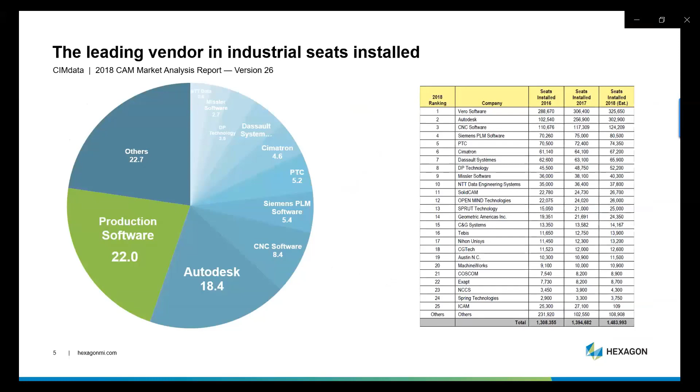Now let's see some of the product lines from Hexagon Production Software. Edgecam is a leading CAM system for NC part programming with unparalleled ease of use and sophisticated toolpath generation. It's the only CAM system you will need for milling, turning, and mill turn machining. WorkNC CAM software is the premier automatic CNC software for surface or solid models in mold, die, and tooling businesses, for 2 to 5 axis CNC programming. WorkNC is used by all Western, Japanese, and Korean automotive makers and well-known OEMs from a range of other industries.

Cabinet Vision is a software for woodworking professionals. It includes design, rendering, pricing, bidding, and cut list report capabilities. Radan is the total CAD CAM solution for cutting sheet metal. We understand metal is precious in your business, and with our software your company can significantly reduce inventory and increase material utilization, allowing you to realize the true return on your investment. Visi is a complete CAD CAM solution for tool makers, right from design to manufacturing. It offers great tools to reduce design cycle time and ensure productivity.

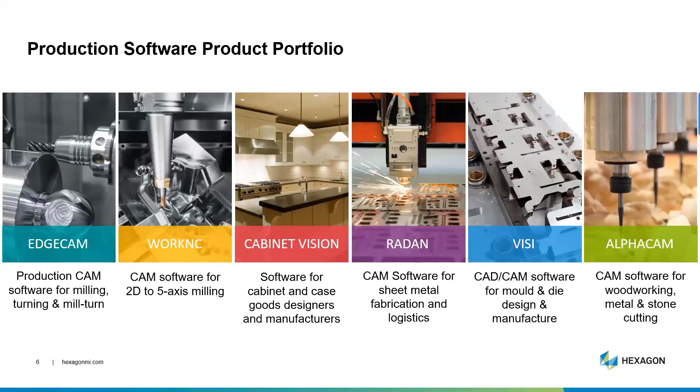AlphaCAM is another intelligent CAD CAM software for woodworking, metal, and stone cutting operations. SurfCam is a market-leading computer-aided manufacturing system for NC part programming. WorkPlan software solutions was developed to meet the requirements and replicate the specific procedures and codes of the CAD CAM industries: budget, time, manpower, materials, resources, costs, and cash flow. WorkPlan will help you control your manufacturing progress and increase your productivity.

Smart is the leading supplier to the whole world of powerful viewing software designed specifically for stamping die industries. WorkXplore is a powerful CAD collaborative viewer which can be used by various departments across the organization. WorkNC Dental is a dedicated CAD CAM software for milling complex dental processes. Fasis is a tooling and resource management software from Hexagon Production Software Unit.

So let us deep dive into today's topic, that is Visi. Visi is an industry-specific CAD CAM solution for tool makers. Right from design to manufacturing, we have all the different modules in Visi which is going to be helpful for your design activity and also going to be beneficial for the organization.

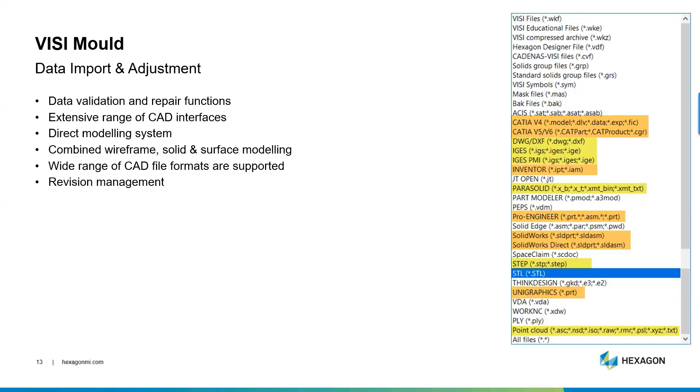But at the same time, you might receive an IGS or STEP file or any neutral file format from your customer. Working on those components is a time-consuming process because you need to get into details of fixing the geometrical errors. But inside Visi, how this can be done so easily with less time, let's look into that.

I have taken a small example here where I'll be working with an IGS file and converting it into a clean solid geometry. Hello, so welcome for the demonstration, and let me start by importing an IGS file.

So I import an IGS file with the default options. Here you can see the progress bar, which indicates what is the status of the import body. So this is the file which I have received, and I need to develop a mold or even a core cavity extraction for the same component. Before that, I would like to check for the validity of the body.

So here we have a search command where I can just search for a command or a particular option. The moment I pick up the command, I just follow the instruction space. This is helpful if you are a fresher or a new user. So let me select the whole body. The body seems to be okay, that means it doesn't have any self-intersecting contour or overlapping surfaces as such.

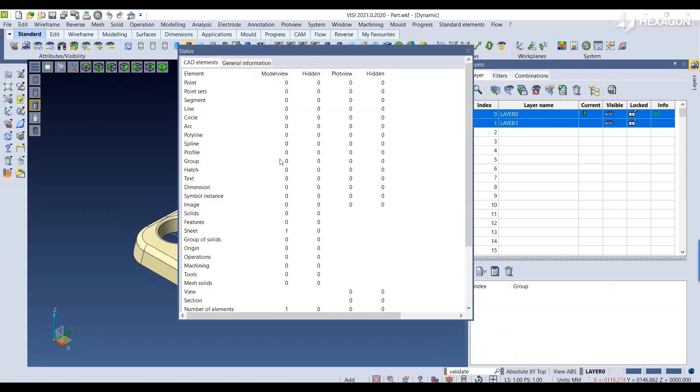The next option would be, let me check for the number of sheets or surfaces it has got. It has 0 solid and 1 sheet. So I need to convert the given sheet into a clean solid geometry. So how do I do that?

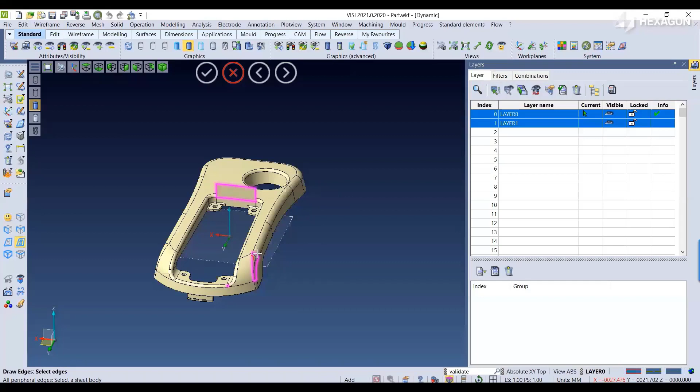So let me perform this, just hover the mouse. You can see that all the open edges are highlighted. So irrespective of the size, even very minute opening edges are listed. You can see that it is very much visible. So with this option, it is quite easy for any user to identify where the opening edges are available. The next thing would be, I need to fix this one.

So let me activate the automatic trimming option so that the surface will get trimmed on the necessary area itself. In the similar line, I would like to create a patch surface in order to fill these two contours. So let me do that. Have a look how easily the surface is going to patch by maintaining a proper tangency with respect to the existing surface around.

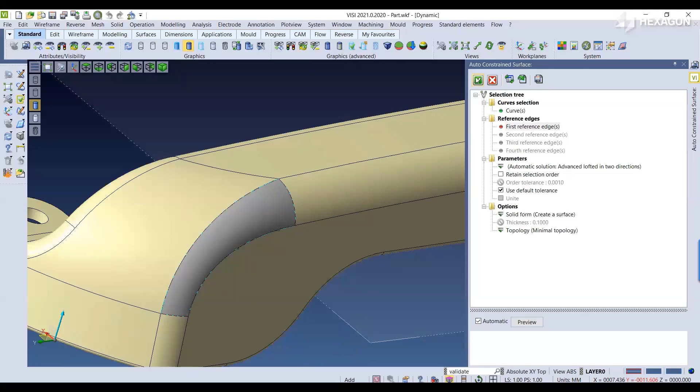Similarly, I would like to create one more surface here. So that's how. Let me unite this. Let me check once again. Yes, you see, I have got 1 clean solid and 0 sheet. So in this way, we have converted a given IGS into a clean solid geometry having no faulty faces or geometrical errors.

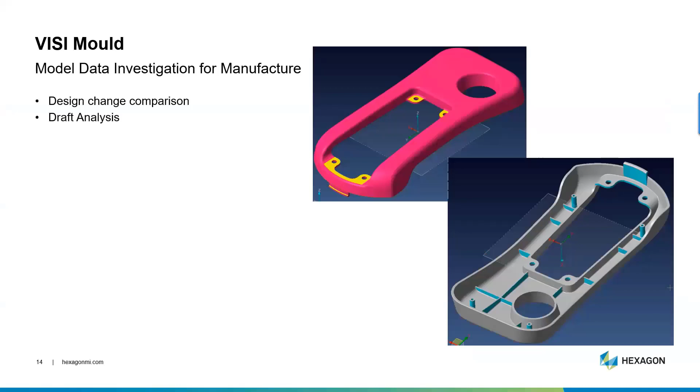So once you have a clean solid geometry, we have an option to compare with the given original data in order to see the similarities and the changes between the similar component. And also you're going to see in the next demonstration how we perform draft analysis and check what are the faces which are not drafted. Plus we will also demonstrate how we can create a parting line, parting surface and core cavity extraction.

So once we have converted into a proper clean solid geometry, the next option would be I need to check for the draft analysis, because I'm not sure whether the given component is completely drafted or not before we proceed with core cavity extraction. So let me perform the draft analysis.

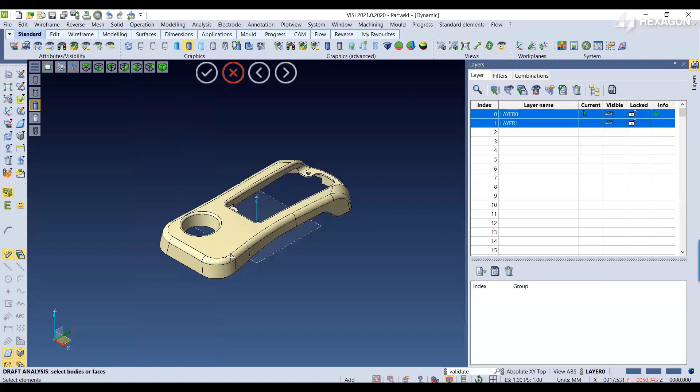This is the part, and then I would like to change the color graphics as per my requirement. You can customize the same. You see that this gives you a nice color code which indicates the undercut and the core cavity split surfaces. So that's how it is very much useful in order to, before getting into the core cavity split, it is equally important for us to know where exactly the software identifies the parting line.

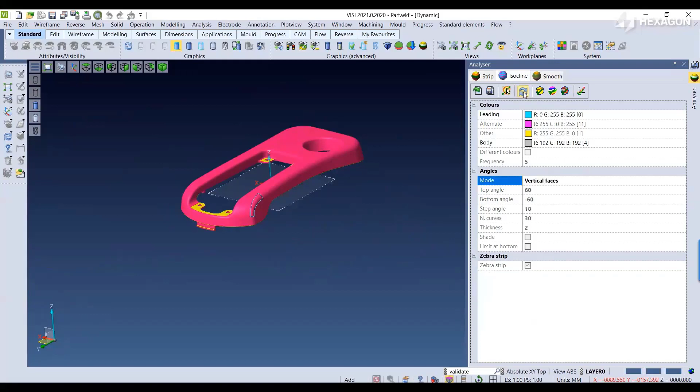Going forward, I would like to check if there are any openings or any draft faces or not. Hope you can see that the green color indicates these are all the non-drafted faces. The gray one indicates it is drafted.

The same can also be checked with Surface Analyzer. Have a look. You see the draft angle is 0, and here it is drafted with -10 degree. So all the colored faces are non-drafted, and the ones in gray color are drafted.

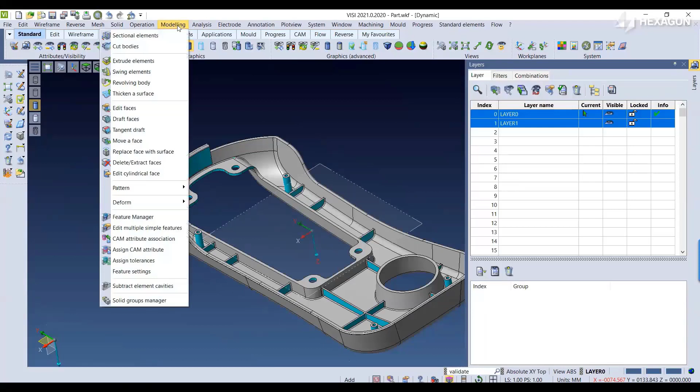So if you want to go ahead with this, I would like to imprint the color code so that it is easy for me to apply a draft and then check it accordingly. So let me apply a draft now, onto this face.

If you see, I have a beautiful option to make use of, because the blend is already available, so I need to apply the draft angle, and automatically the blend is recreated every time. So this is how the draft can be applied. Let me apply a draft over here.

Visi comes with a very powerful selection method. How exactly? Have a look. I would like to select from this region to this, and this is the face to be drafted. So without much clicking and picking, I have selected the entire range in just 2 clicks of a button. In a way, Visi is very powerful in selecting the required surface or geometry.

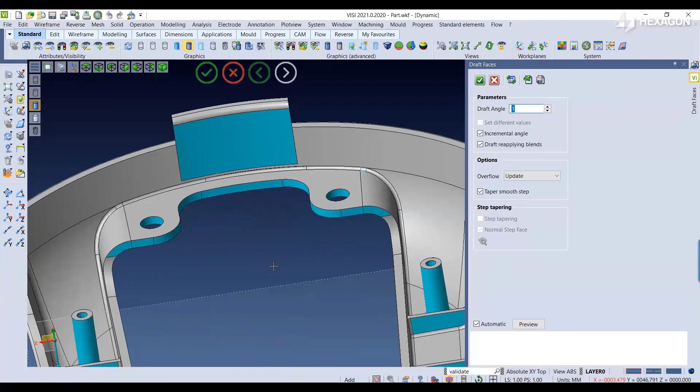So let me apply a draft there, and then I will just run a draft analysis once again on the same component. Let me update this. Yes, can you see that this face, which was colored like this before, is now turned to gray, even over here. This indicates that we have applied a draft, and the color graphics is also updated.

So going forward, I have already completed the entire draft over here. Let me open that. So this is the model which is completely drafted, and you can check it with respect to the data shared by the customer. So what do I do now?

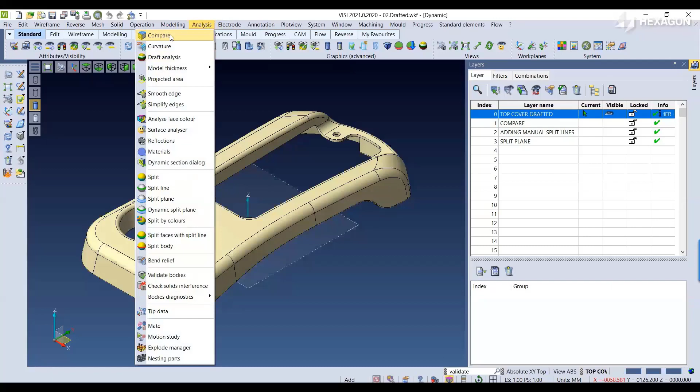Let me have a comparison between these two. So I use a compare, and these are the two parts to be compared. Let me pick one and also select another one. Just go for a comparison.

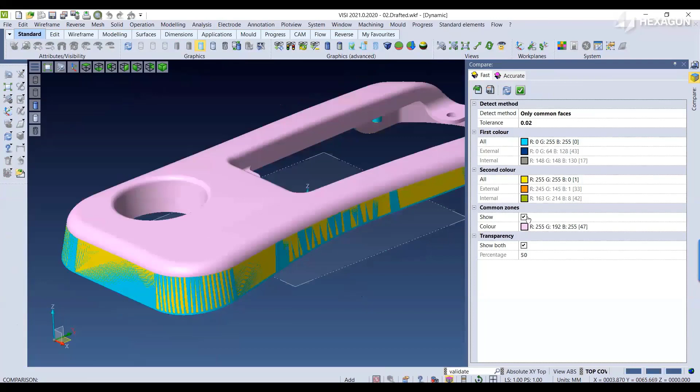You see that the pink color region indicates the common face, indicating the two different faces from the two components. So if you would like to untick it, you see this is the exact change, or what are the internal and external differences that you got.

If I want to show only the external to internal, you can also take this option and have a look. Yeah, this is the exact change, indicating the internal and external differences. If you want to see the change, this is pertaining to component 1, this is with respect to the second part. So that's how the comparison tool is very effective in comparing two similar models.

So what we have done so far: we have analyzed the given IGS, converted it into a clean solid geometry, checked for the draft faces. Wherever the faces were not drafted, we applied a draft, and then we also compared it with respect to the original data supplied by the customer.

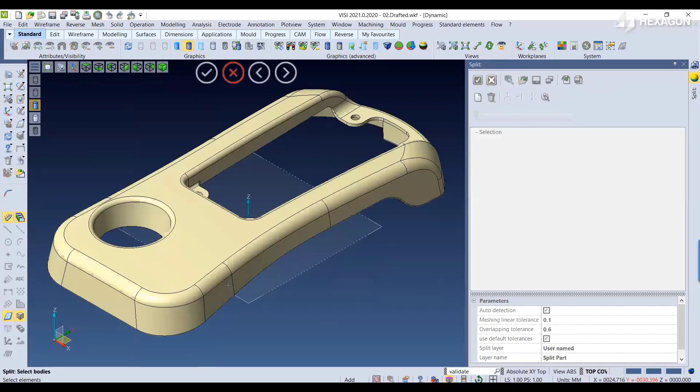Now the next option would be, I would like to create a core-cavity split for the given part. How do I do that? Let me make use of the automatic option by splitting this part. So let me select the given part, and the rest will be taken care of by the software in order to split it automatically. Have a look.

So this is how the given part is split across, having the core and cavity side along with an undercut and the side cores.

Suppose if you do not wish to go with the software recommendation, you can just quit that and create your own as well. So let me create a parting line by my own. So here, this is the part which I need to go for.

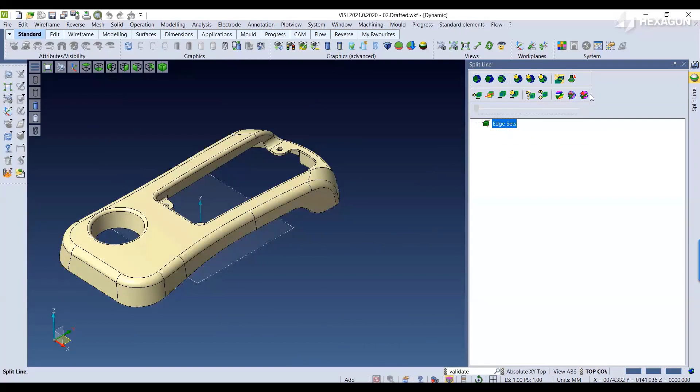Have a look, easily we have created a parting line. If you're okay with this, you see the core cavity is properly extracted.

So now let me apply this and then draw a split line. Once you apply the parting line, the next option would be creating parting surfaces. So let me do that.

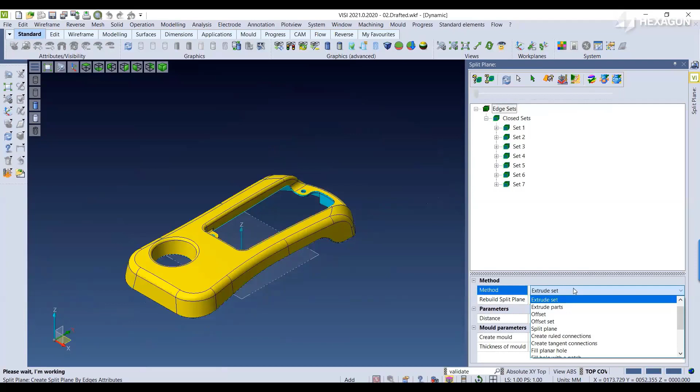I just make use of the dynamic split plane option here. Change the shading mode. Ensure that we have multiple methods of creating parting surfaces. I use the one which is relevant at this time, and then I would like to pick this edge up to over here. I would like to create a parting surface.

Similarly onto the other side, from here. Hope you're observing that I'm just not selecting each and every edge manually. So you see, now let me use some other option.

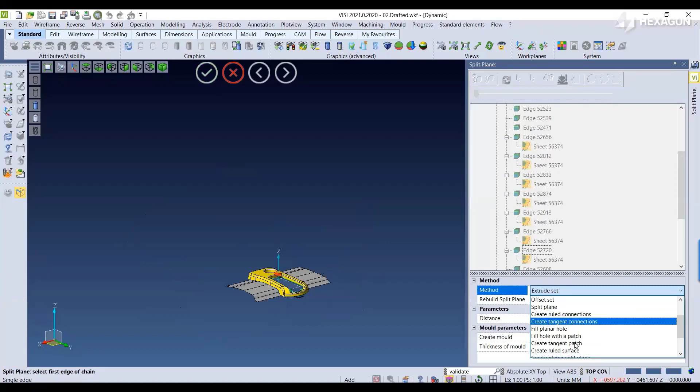Probably this time I would like to create a tangent patch from here to here. Have a look how easily we have created a very smooth surface connecting the other two surfaces.

On a similar line, I would like to create and complete the parting surface creation along with the peripheral edges. There you go.

So that's how the parting surface is created for the set across, and I have many more to do that. For example, these are all the parting lines which I need to fill hole with a patch.

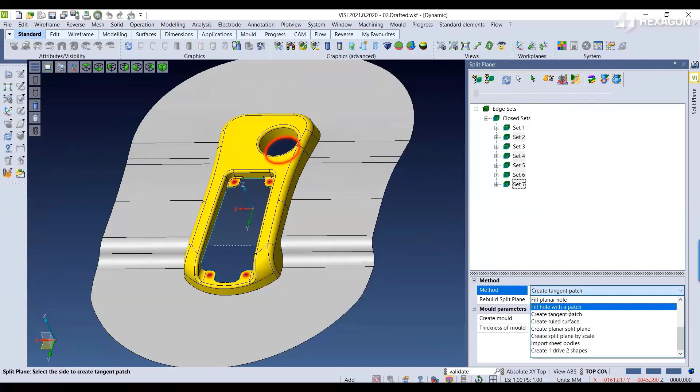Let me update it. You see, in a single click all the holes have been patched properly.

Suppose if you are using one or the other CAD currently, you can also import any geometry created in some other CAD file. So let me do that. I would like to import this body over here.

Okay, so let me apply for this. Now I would like to import, say, merge this. I'm just importing a sheet which is created in some other CAD file, but as Visi supports different file formats, I'm just importing a step file, and let me merge it like this.

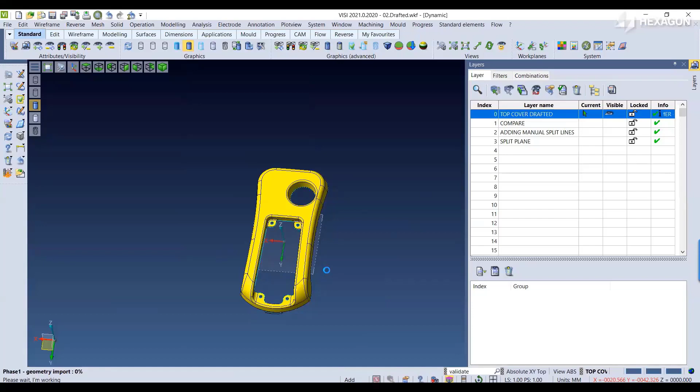I'll go back to my parting surface, change the shading mode, import the sheet body, and yeah, so this is the sheet body imported, where it is automatically going to consider that as a parting surface.

If everything is fine, you just have a check. You see how we have created a core cavity extraction from this. So let me decide the thickness of the mold and say create mold.

Yes, so we are done with the first phase, that we have created a core cavity insert from the given part. So let me show it to you once.

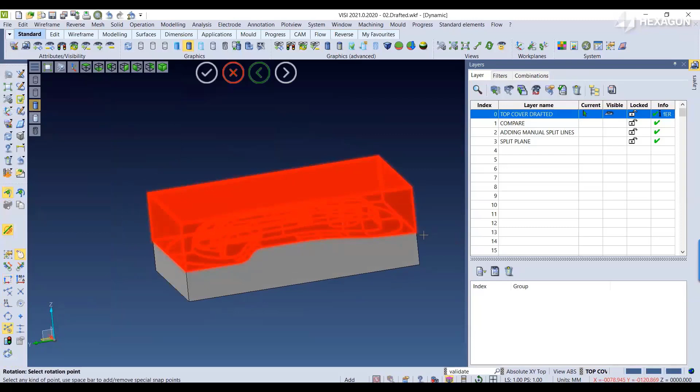So this is the part file which I've got, and over to it. So this is how we have created the parting line, parting surface, and the core cavity extraction.

So in the next demonstration, you will be visualizing how we can build an entire mold tool on the core cavity plates created. In addition, you will also see how we make use of standard elements and user-defined elements in our mold design. Plus, we will also show you how we can create a slider core and lifter mechanisms for the mold design.

So after creating a core cavity split, I would like to build a mold tool for the same, where I just make use of a tool design option. The software is going to load with the default, but then let me pick the insert plates.

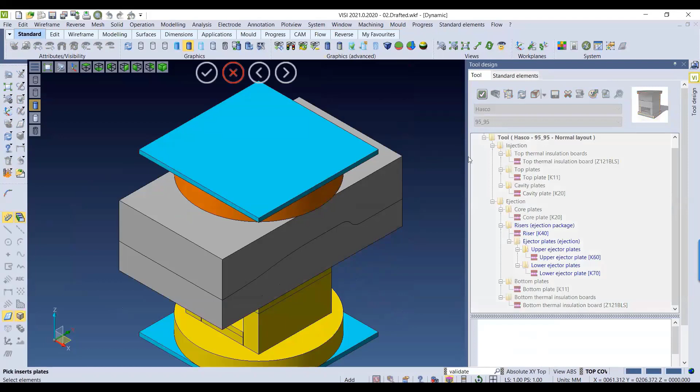So I would like to define with respect to the given origin. You can see that automatically the entire mold tool has been updated.

So here you can also select the standard as per your requirement. We have DME, Futaba, Hasco, Meusburger, Pedrotti, Strack, etc. And suppose in this case, if I want to choose Hasco, I have got various configurations over here, let me select the one as per my requirement.

Once the mold base is built, you have more flexibility in order to decide what plates you have to customize. In this example, suppose if you think this is not relevant to my design, you can just say delete it. You can also do the same thing onto the bottom one.

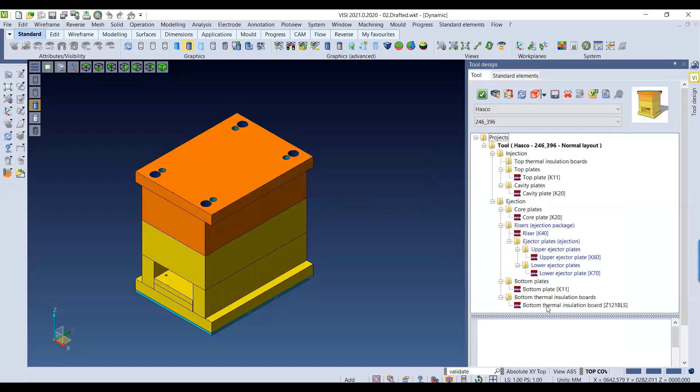Suppose if you wish to change some of the dimensions, you can just go and pick up the plate and you have different options here to select for. Similarly, if you want to change some of the items here, you can just change accordingly the way you require.

So similarly, if I want to change, say let me give an opening value about 2 over here, and then ejection side opening value about 2 again. So that is how the complete mold base can be configured and customized as per your requirement.

Going forward, you can also add the preliminary standard templates with respect to the Hasco which I've selected. So let me load the Hasco one, and this is the normal layout which I'm going to make use of.

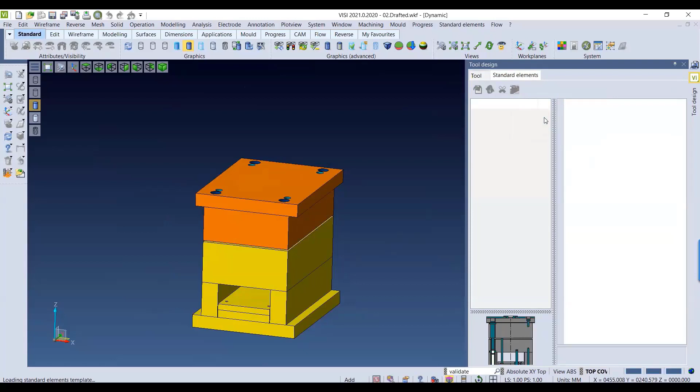Automatically the software considers the standard elements with respect to the configuration selected. You have an option to select or deselect as per your design intent. For example, if this locating ring is not required, you can untick to delete it. Similarly, I don't want it on the bottom side either, so let me untick this. With the remaining options, I'll go with the default and accept this tool base.

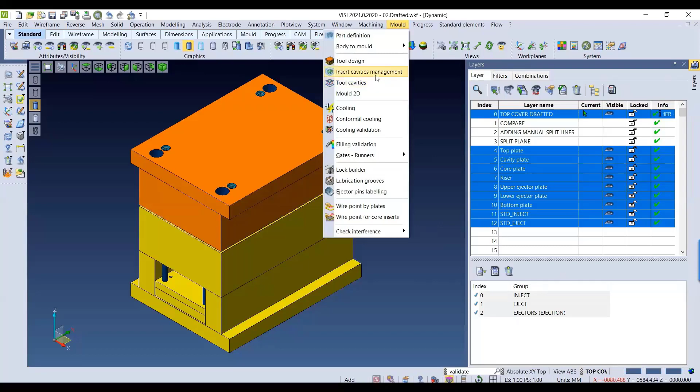Once the tool base is accepted, you have the complete mold base created for your part. Now let us move forward by creating some cavity inserts and using some standard elements. I'll go for insert cavities management and choose the plates accordingly. I have got the inserts to be selected.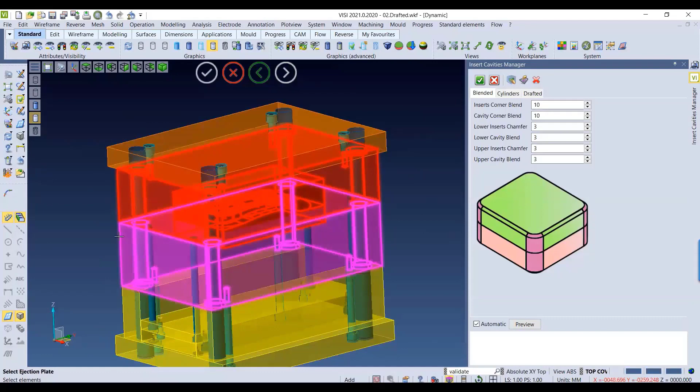I need to pick up the ejection plate. The instruction space tells me what exactly I have to pick now. So I'm going to select an ejection plate, and that's how the cavity has been created on these two plates. If you want, you can choose between the cylindrical type or go for the drafted one. The preview clearly shows what type of insert cavities we are creating. Let me accept that.

Once the cavity has been created, I'm going to make use of some standard elements. Let me show you what standard mold catalogs are available within VISI. You see, we have many suppliers available in our library, and out of these, some are frequently used, so they've been customized and kept in the standard element list.

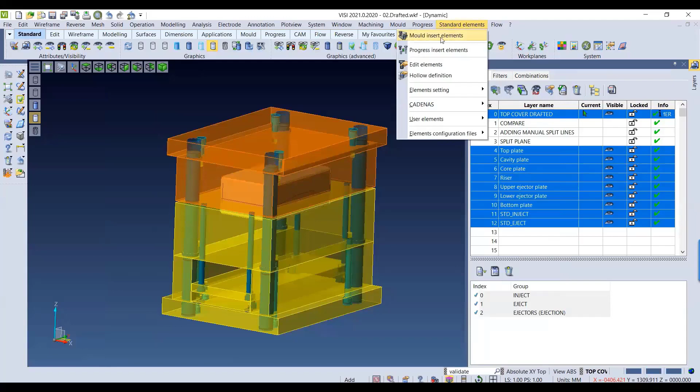Now I would like to insert some mold standard elements. Let me use Hasco, and I'm going to make use of a sprue bush. I have got different parts here. Let me choose Z511R. Here it clearly states what plates are to be selected.

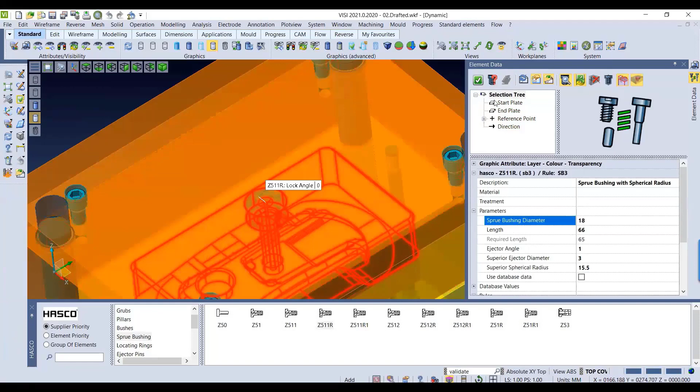This is my start plate and this is my end plate. I would like to go with the default setting, and you have different configuration items to be selected for. Let me use the default one and accept it. That's how the sprue bush is created here.

Now there are a few parts which are customized, and I need to use them in the existing design. There are a few non-standard parts which I can bring in and consider as an element or a standard one. So how do we do that? Let me use some of the user-defined elements. I would like to load the user elements here.

So I'm going to pick the user element. I've got this register ring which is defined or created by the user. Here I have an option to place it accordingly, and if you want you can add an instance or confirm this. Once placed, let me go to the solid group manager and dissolve this, so that it behaves as a normal part. That's how we can also bring user-defined elements into the mold base.

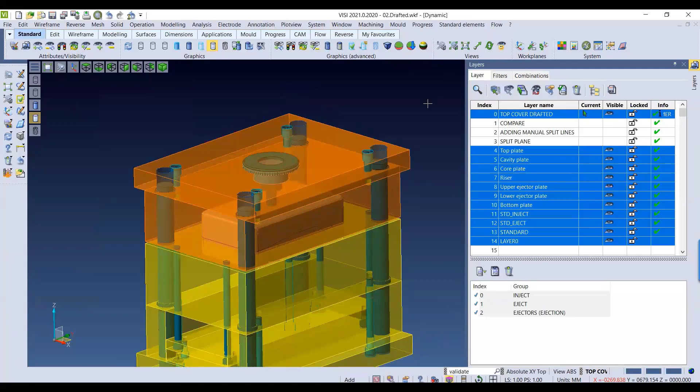Let us switch back to standard elements, and this time I'm going to use the fixing. I'm going to select the start plate and the end plate. Let me define it by selecting over here, with the diameter I'm going to consider 8. Okay, confirm this.

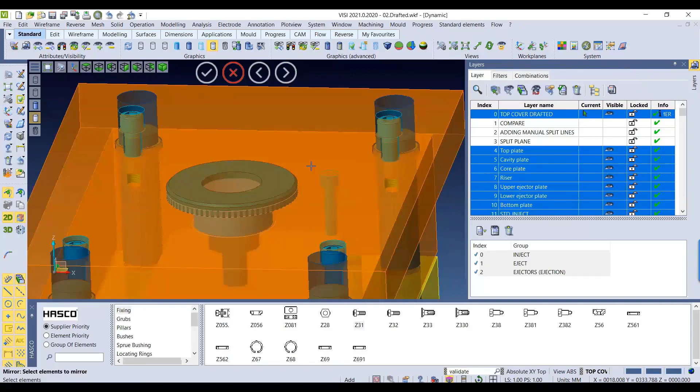And now I shall mirror it. The best option of mirroring here is we can mirror it about this element to be mirrored across these points and all together. You see, in one mirror command I have created a mirror about two directions - one is X and one is along the Y axis.

So until now we have seen how to add cavity inserts and use some standard elements along with user-defined elements as well. Next, let us see how we define lifters and slide cores.

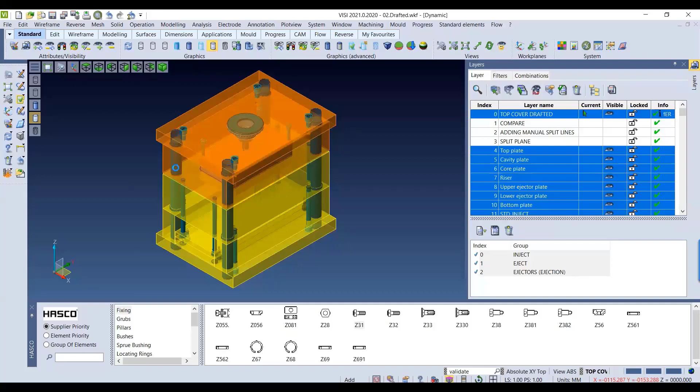Now let us define a runner gate and also a cooling channel. Let me turn on only the injection assembly. So here, let me say create runner. I have a runner wizard which takes you from circuit, section, parts and also the gate along with an injection cone definition. You have different types to be selected here. Let me choose the one that is straight for me, and hope you can see the preview over here.

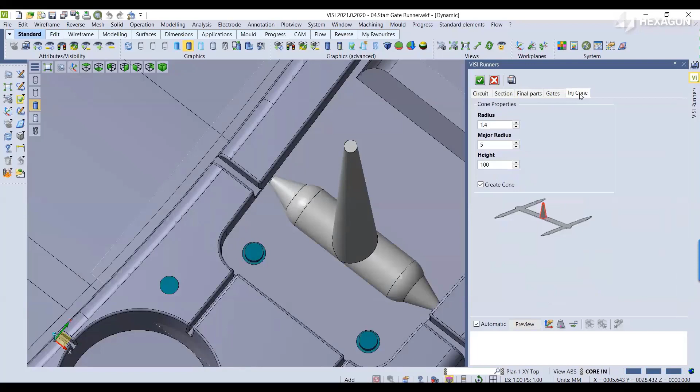Let me go for a section. You can go for a semicircular, triangular, trapezoidal, or circular one as per your requirement. Let me have a total height of say 100. This is the cone created for the injection cone. Let me accept the result.

You see, that's how a runner gate is created for this component.

Going forward, let us also add the cooling circuit for this design. If you see, this is the existing cooling circuit that I have added. Let me show you how we do that. You can add a group for this and then sketch the channel required.

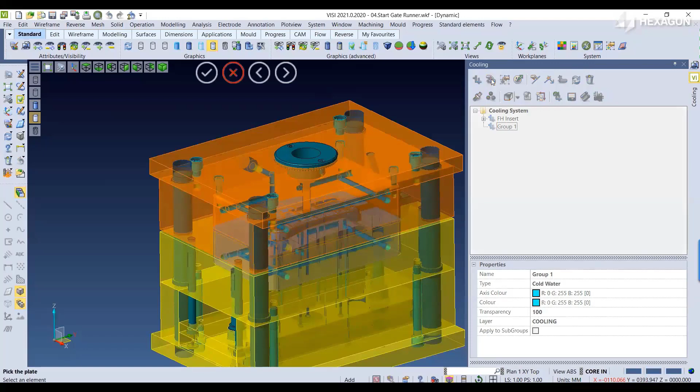This is the plate where I need to go, and I can select the orientation. If I would like to have the cooling channel from here over to this length, that's how the cooling circuit is added. You can also add fittings over here.

Let me choose the one, confirm this, and I would say solidify this cooling channel. Hope you can see that this is the cooling channel I have added now.

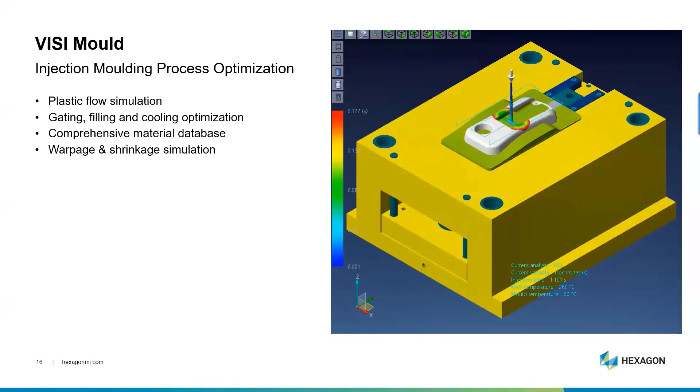Visi has a dedicated module called Visi Flow, where you can perform plastic flow simulation, which comprises gate location definition, filling stage, holding stage, and shape analysis. We have a wide range of material database to simulate it, plus you can also estimate warpage and shrinkage. In the following demonstration, we are going to see the light version of Visi Flow called Flow Lite. If you have a Visi mold license, you can comprehensively perform a part-level flow analysis.

Let us have a look into the same example. Let me use the Flow Lite wizard. I would start by creating a mesh for the given body. Let me choose the default options, or you can change some settings, and then accept it.

You can see that we have created mesh data. Going forward, I will assign and compute the thickness. So thickness calculation is in progress, and some deviations are available. If you want to change that, you can assign a thickness, or else proceed further with formatting.

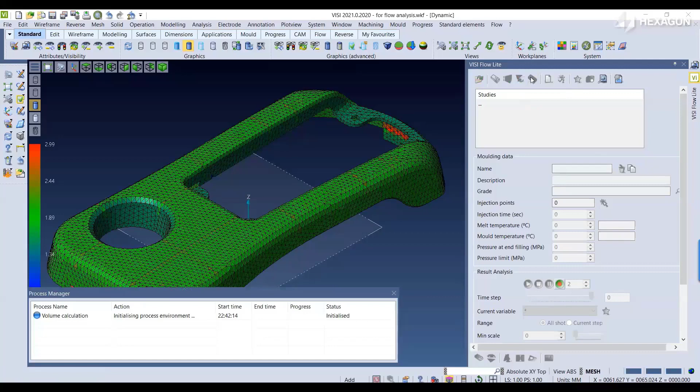Let us give some relevant name for this—it's a flow analysis at part level.

Once the given parameters are formatted, you are good to go to define the remaining boundary conditions like injection point, material, etc. So let me assign a material. I go with the default ABS option, and then I would like to pick up the injection point here.

So let me pick up one injection point, and then another injection point. Once you have selected the two injection points, you can have n number of points picked. Here you can also check for different configurations—what if the injection point is selected at this location, how the results will vary, and what if the injection point is changed, how the relevant result is going to depend upon that.

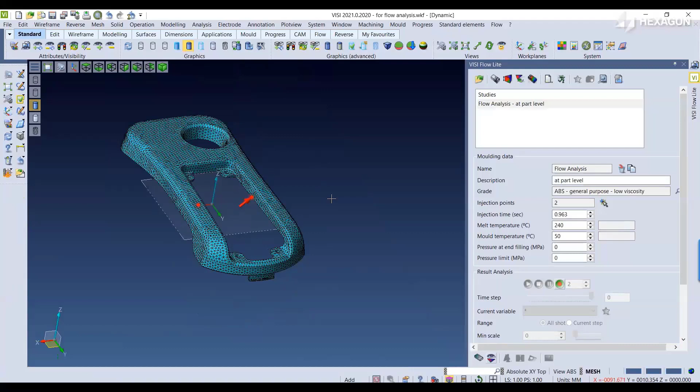So rest all is fine. Let me calculate this flow analysis now. In the light version of Visi Flow, you can estimate the temperature and pressure distribution across the part at the filling stage, and also evaluate air traps, sink marks, and weld lines.

So it is going to compute the weld lines created so far. Have a check on this, where the weld lines are created. You can also find the air traps.

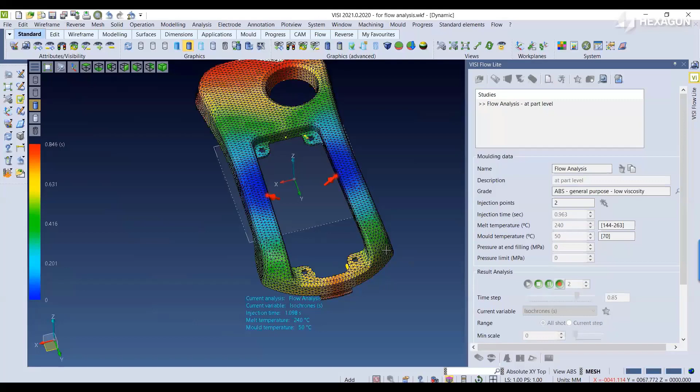With this, you can also check the overall quality of the part. The one which is saying it is too high—the pink indicates the problematic area. Let me go for the pressure at the same time. Have a check on the overall quality.

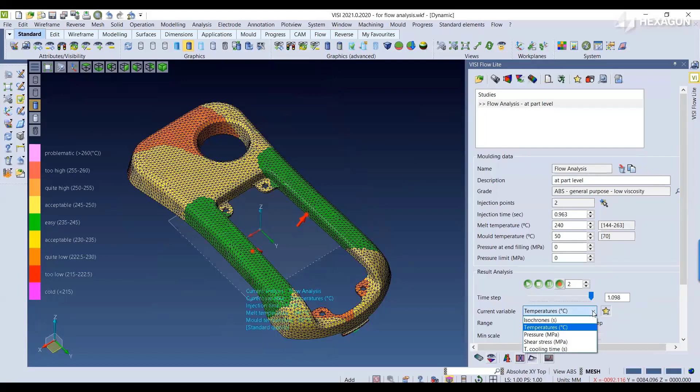You see, the pressure distribution across the part is very good. So this is how the quality of the part can be estimated with the help of Flow Lite.

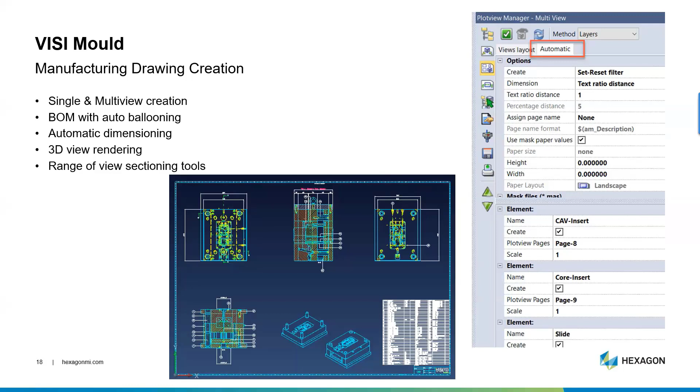Once the complete mold tool is built, you can perform a collision check as well as a physical dynamics check by simulating or animating the mechanical movements of the entire assembly in Visi software. Nonetheless, Visi has a very powerful documentation option where you can create a complete set of part drawings and general assembly drawings in a much easier and automatic way.

So far we have seen how to import an IGES file, look for geometrical errors, fix that, convert into a clean solid geometry, and look for the drafted faces.

If it is not drafted, apply a draft, create a parting line, create a parting surface, and then create a core cavity extraction. Once the core cavity inserts are extracted, we have built a complete mold base as per industry standard, using both user elements and standard elements. We have also seen how to add a slide core assembly with a lifter or slide core pin, and created a runner gate system along with a cooling circuit.

So with this, we have come to the final stage of mold design, which is documentation. Nothing is complete without documenting the entire design we have created so far. Let me go for the documentation. I'll switch to automatic mode and just say create it. Use the automatic option, sit back and relax, and the rest of creating part drawings, assembly drawings, everything will be done by the software itself.

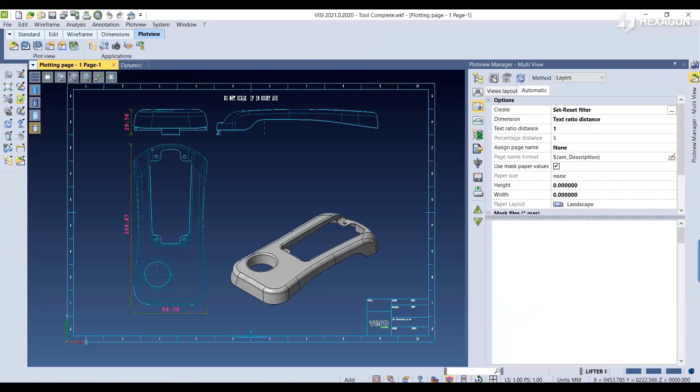Hope you can see that these many sheets have been created by the software with the peripheral dimensions. If you would like to add apart from this on your own, you can still select it, choose your own page, and define the mask for this. Now let us define standard views. Even here you can change the scale as per your requirement, with all the flexibility and freedom to change it.

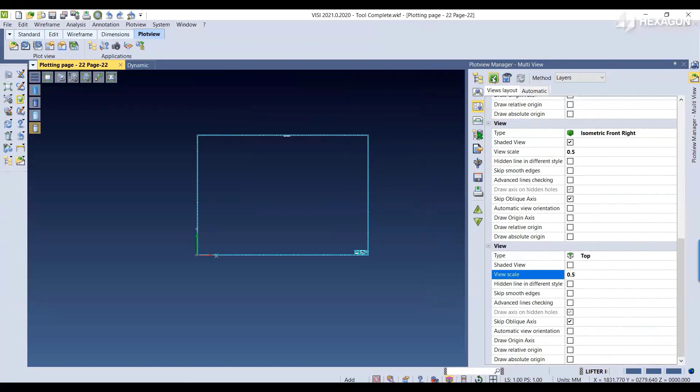Nothing is complete without adding a part list. Let me use all the rows, and that's how you see the complete assembly drawing is created with the bill of material or a part list table.

Visi Electrode offers a complete solution for electrode extraction, stock definition, and managing the entire set of electrodes created, and documentation is much more easier. Let's have a look into this.

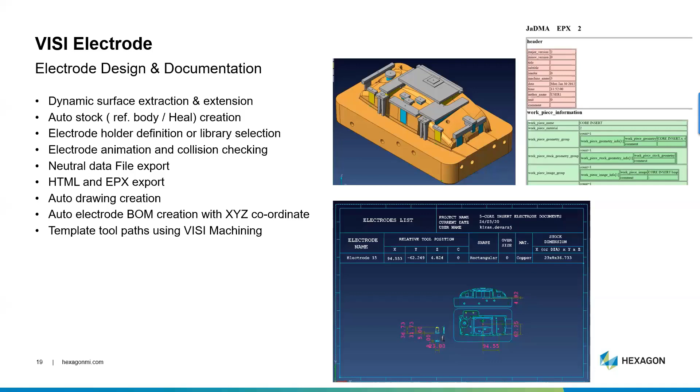Now let us see a demonstration of electrode design and documentation. In Visi we have a dedicated set of commands under Visi Electrode. Let me extract an electrode. So that is the area where I need to extract it. You can see that the electrode is automatically created.

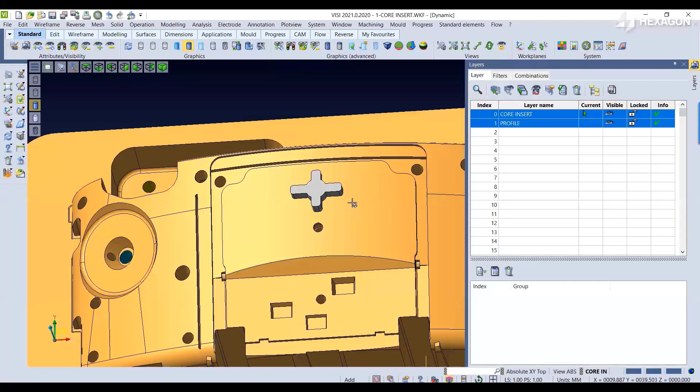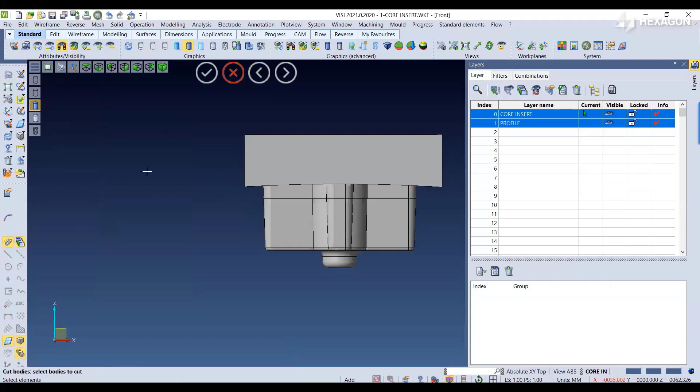Now let us see one more method of creating an electrode. I can also switch back to the CAD function in order to see another way of extracting the electrode here. Let me move this face a little bit upward. Meanwhile, I would like to create an electrode extraction from this piece of geometry. Let me highlight the one of interest. You can also see the CAD capabilities in creating this.

Since it is difficult to manufacture this type of electrode with sharp edges, I would like to modify the same. Let me apply some radius. That's how an electrode is extracted.

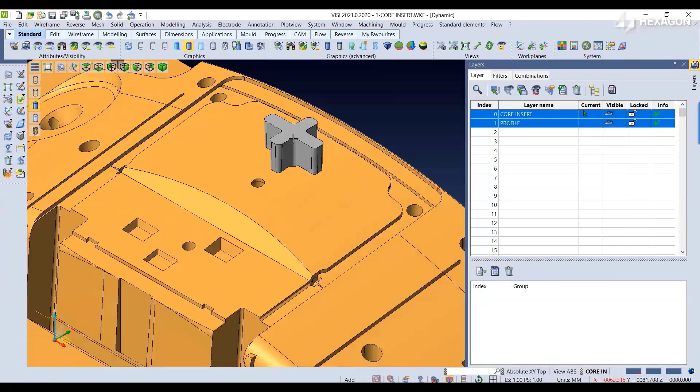Let me change a bit over here. Now for this electrode extracted, let me define a stock. I just need to pick this up and the body to check for a collision. You see the relevant stock has been added. You can also set the stock type either circular or rectangular. You can also mention the width and depth of the stock definition, or there are some standards available where you can pick this up again.

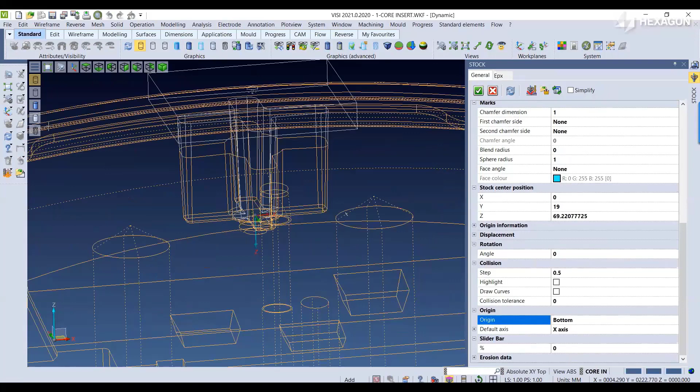You can also change the reference axis from top to bottom, manual, or even at the stock bottom face. Let me have it from the bottom surface over here, and then for this you can also check for a collision if any. No collision detected. That's perfect.

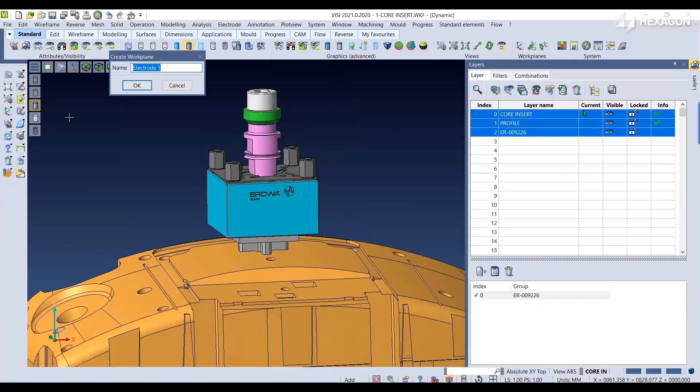Similarly, let me show you how we can add a piece of electrode on a different region. This time I would like to select this slot. This is the body to check for a collision. And then you can also check for collision here. You see there is a collision detected.

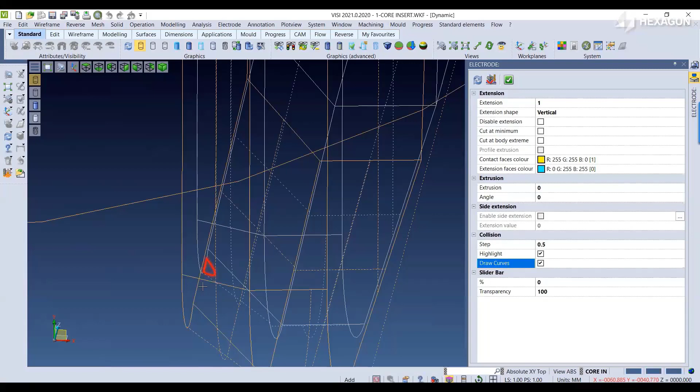If you would like to highlight it and draw a curve on the collision check, you can turn this option on. Can you see this here? It's been highlighted by drawing a curve where there is a collision. Modify this and then apply a blend over here. Now let me extract an electrode once again.

To add some strengthening purpose, you can also mention the extrusion along with an angle. Check for a collision.

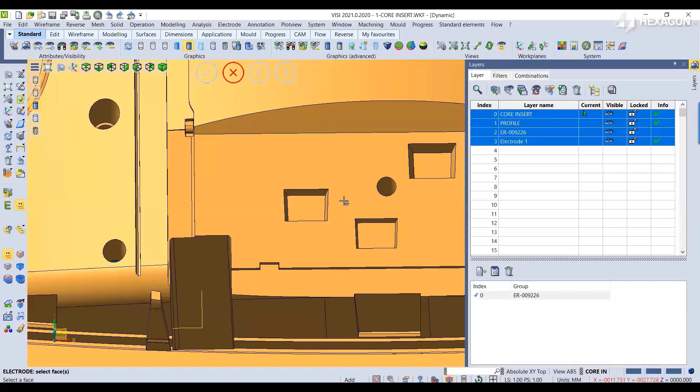Perfect. I will show you one more electrode extraction on this region. This is the body to check for a collision. I would accept with the default option.

Let me create a stock for the same. This is the body to check for a collision. If you want, you can reduce the width and depth of it, and then confirm this.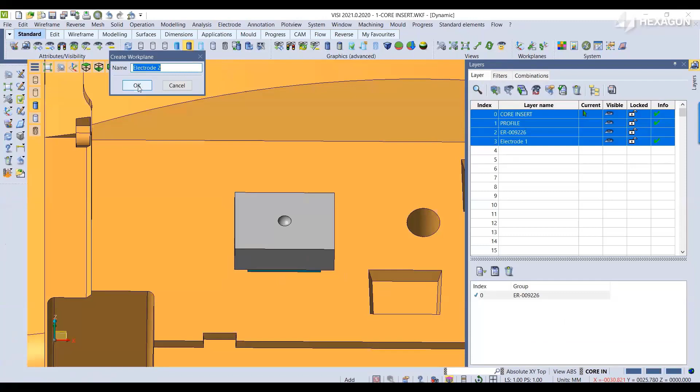Now all the electrodes created can be well managed with the Electrode Manager option. Here all you have to define the project parameters.

Electrode project is the name given, who is the sender, which machine I'm using here, who is the author, you can also mention the same, and this is the workpiece to be picked up.

That's the core insert name. If you want, you can also define the material.

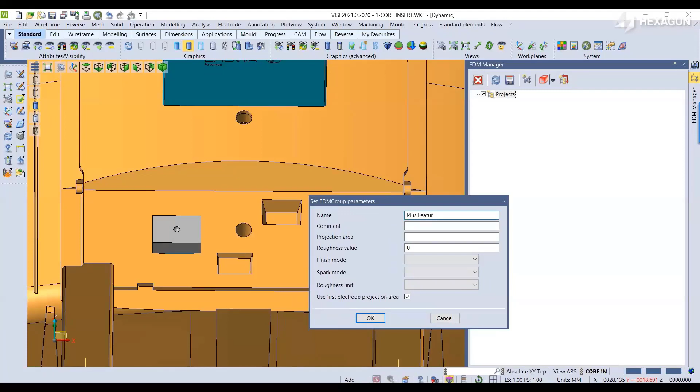I'm going to define a plus feature electrode here. You have a provision to define the finish mode, the spark mode, and the roughness unit value. Typically we go with RA, and let me have 0.8.

This is the electrode to be picked for. There it is. Similarly, I can add another group. This time I would say it's a square pocket.

And in this one, this is the electrode to be picked for. The electrode has been defined in the EDM manager. Now I can create multiple electrodes by a drag position method.

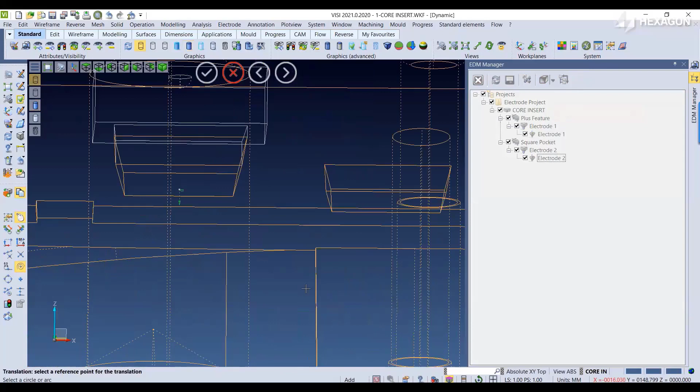This is the reference point to be picked and placed, one and another one here. Now creating or documenting all these electrodes is much more easier in Visi Electrode. Let me show you that.

I go with the list and then just confirm the list over here. You can also define the mask. Let me use portrait type. So here are the list of electrodes created.

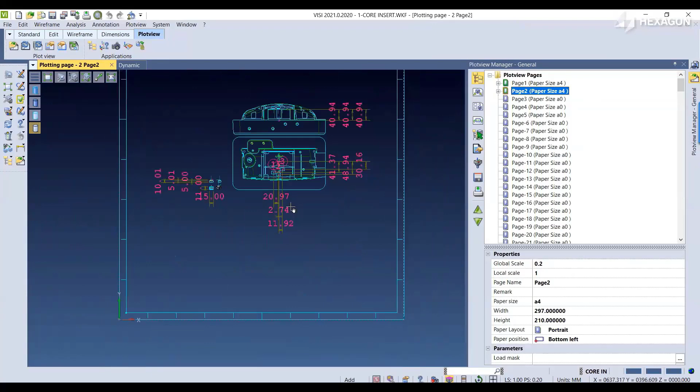So this has the electrode list along with the relative tool position and the type of electrode used, the oversize, the material, and the stock definition, when it is created. All the piece of information are available here. A complete report.

Let me define it on the desktop. I'm gonna create with a new folder. I would say this is my electrode report. Pick this one once again.

So this is how all the piece of information has been added here. You can see that the electrode has been created, and plus you also have the detailed information, the position for 2 electrodes, 3 electrodes created.

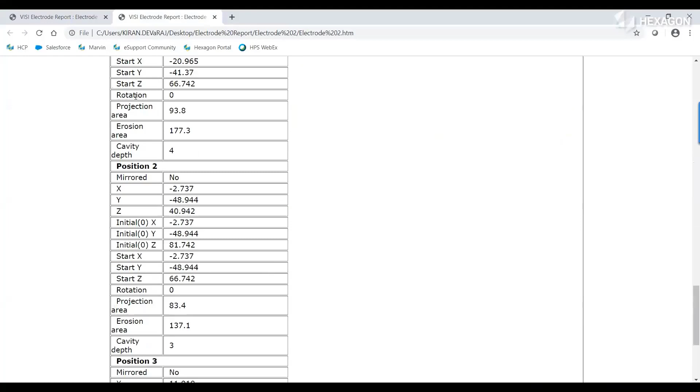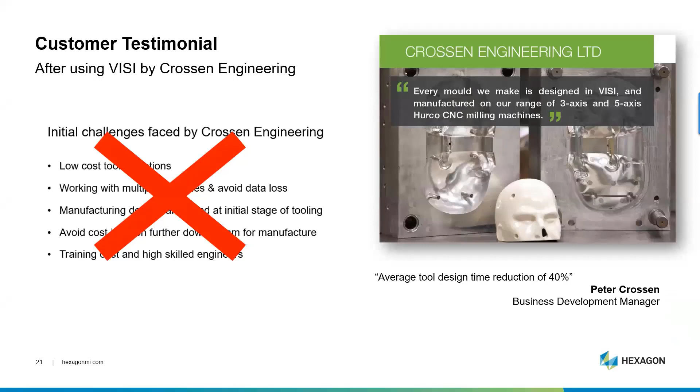And also he says that every mold we make is designed in Visi and manufactured on our range of 3-axis and 5-axis Hurco CNC milling machines. So this is the testimonial from Crossen Engineering. So with this note, I would like to conclude that Visi is easy.

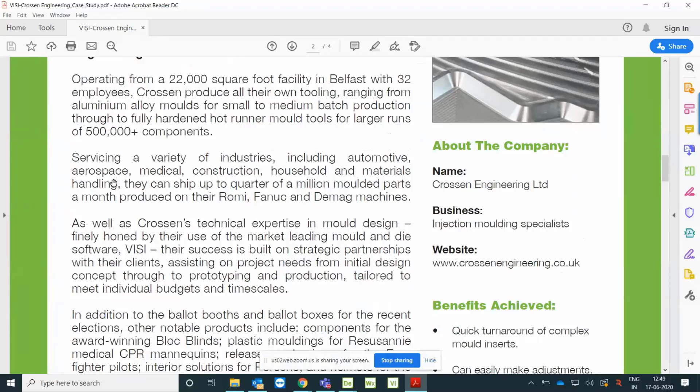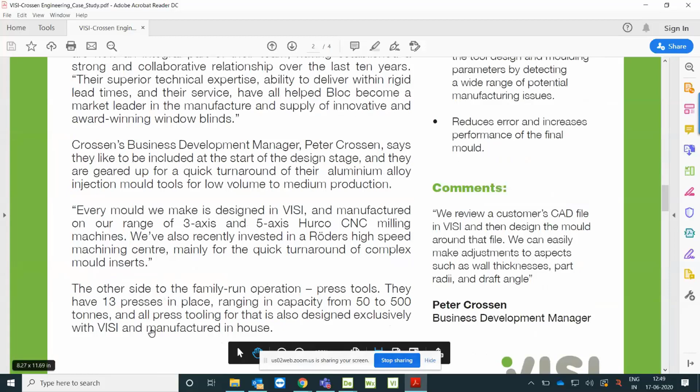So they have used complete Visi license. Hope you can see that. Yeah, there you go. You see, the other side to the family run operation press tools, they have 13 presses in place, ranging from 50 to 500 tons, and all manufactured in-house using Visi itself. So they have reduced error and increased performance of the final mold. What VisiFlow has done is preventive analysis. The software optimizes the tool design and molding parameters by detecting a wide range of potential manufacturing issues. So any adjustments, any modification, they can do it quickly and easily with our flow license, VisiMold.

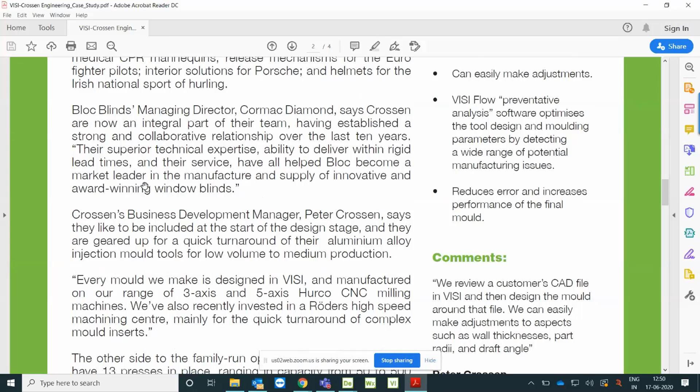So this is what the managing director has talked about. Their superior technical expertise, ability to deliver within rigid lead times, and their service have all helped Bloc become a market leader in the manufacture and supply of innovative, award-winning window blinds. They have used the Visi CAD module for several years, but have only recently installed VisiFlow, which is now playing an increasingly important part in their process.

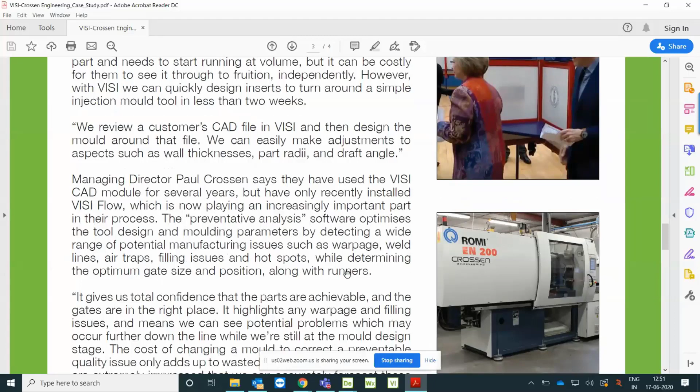One more question was asked, on positioning or optimizing the gate size, position and location along with the runner. The preventative analysis software optimizes tool design and molding parameters by detecting a wide range of potential manufacturing issues such as warpage, weld lines, air traps, filling issues, and hotspots, while determining the optimum gate size and position along with runners. That gives total confidence for the parts achieved using the VisiFlow license.

So here it has a detailed story of what they are using and how it's built, and the benefits for them. You can make use of this. I've got many more case studies like that—so many customers using our product across the globe.

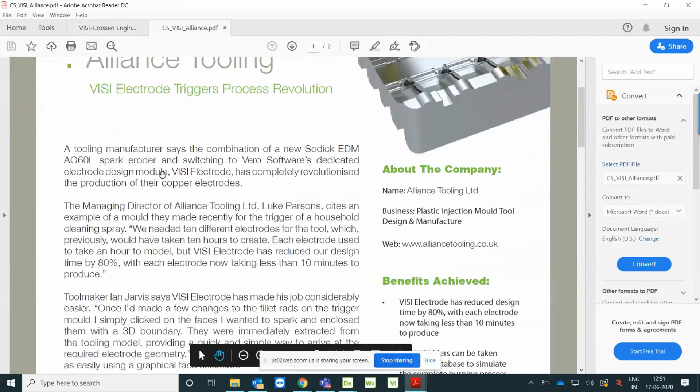This is one more customer using Visi Electrode. Visi Electrode has reduced design time by 80%, with each electrode now taking less than 10 minutes to produce. They are using the Sodick AG60L 6-station tool changer spark eroder for maximizing lights-out usage. I have a lot of customers who have shared their success stories with us. I hope this is helpful.

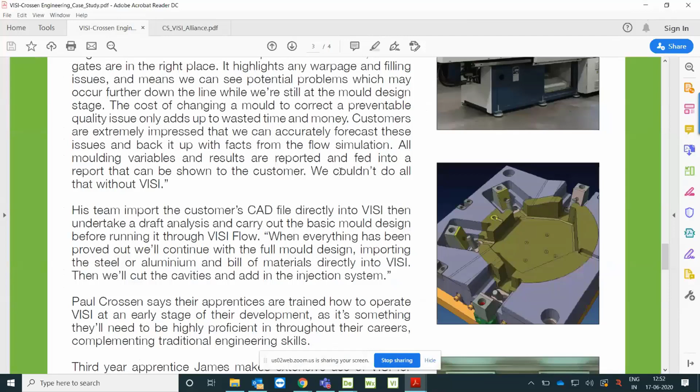Okay, Mr. Kiran, can you make me a host again? Dwi, you can click Dwi more and make a host, because I cannot share the screen and watch the poll at the same time. Oh okay, I'm so sorry. Sorry, Mr. Kiran, Mas, I think yes.

I want to have one question answered—sorry Mas, trying to answer for the customer because I don't want the audience confused about flow simulation here. So can Visi only do simulation for plastic injection, or also plastic casting simulation? No, only plastic, no casting. So, what we can simulate is only for plastic injection. But for designing, we can design dies and other things too, like tires, but the flow simulation capability is only for plastics.